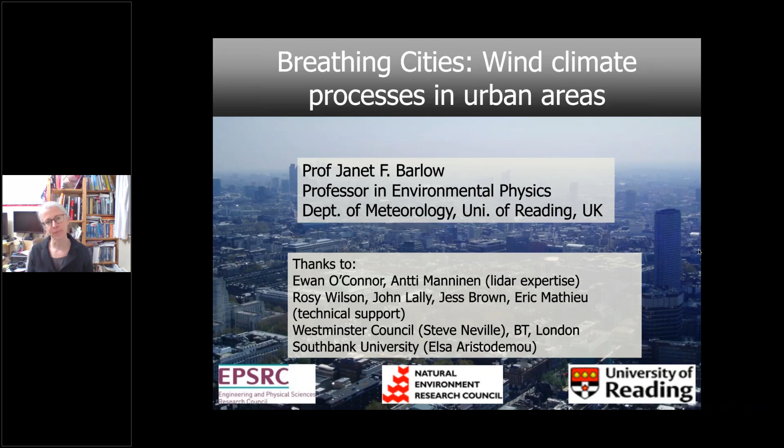So we see increasing awareness of the quality of air that we breathe. Certainly in urban areas, we know that cities are very polluted. They're polluted at the scale of the city and the streets where the traffic is emitting the pollution. And we're aware that in our buildings, we have indoor air quality issues which are starting to come up the agenda. Now, in this particular year with COVID, we are very much starting to talk more about ventilation. So good ventilation of buildings. So how do we exchange stale, polluted, perhaps pathogen-laden air inside our buildings with fresher air outside? And how can we do that effectively?

But then we have to think that the air we're taking into our windows comes from the streets outside. Good ventilation depends on having clean air at street level, and the air in the street is influenced by the quality of air at city level. So all these processes are connected to determine what the quality of air is in the buildings in which we live. And not just air quality, an increasing concern is temperature. So are our buildings overheating, and will they overheat in the future? And so ventilating buildings and cities effectively is something we need to think about design issues in cities to achieve. Next slide.

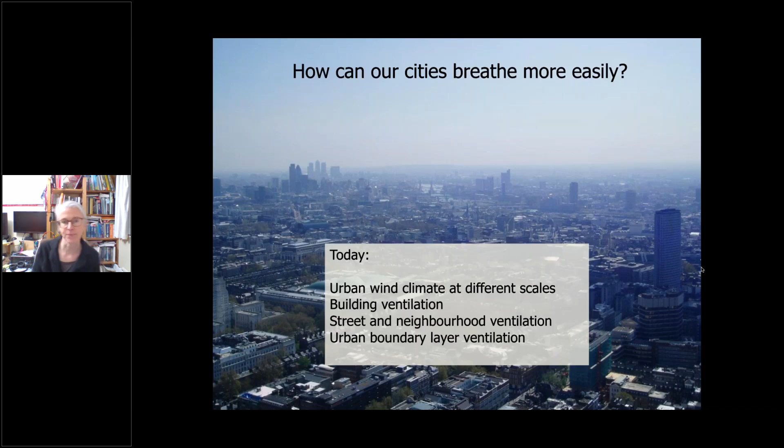Okay, so starting with the processes, we can think about that. Yes, please, next.

We can think about the processes of wind flow around our individual buildings, where we might be sitting watching this talk. And we know that the flow is very 3-dimensional. It's very much determined by the shape of the street and the building itself. We know this 3-dimensionality of the flow is what we find in the roughness sublayer. Right? So this is the bottom layer of the atmosphere, above which we find the inertial sublayer, where the flow is a lot more homogeneous.

It's the same everywhere. And the depth of the roughness sublayer is around about 2 to 5 building heights, which we give the symbol H. And the scale of the street is around about 10 to 100 meters. Next.

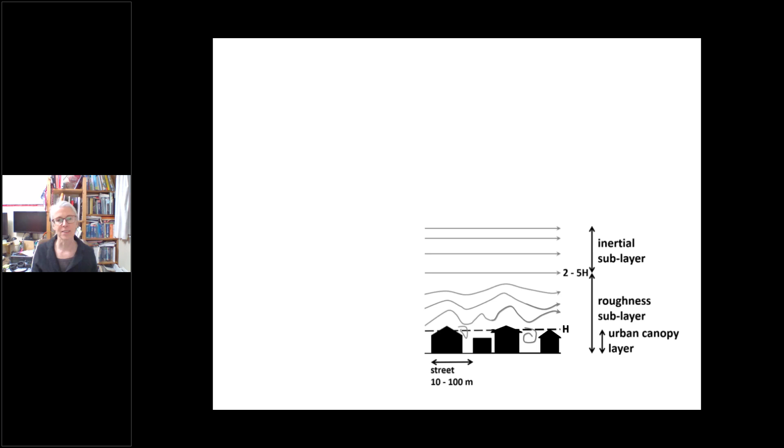So if we zoom out a little bit, that street is sitting in a neighborhood of similar buildings, which might have a scale of around 100 to 1,000 meters. So that's a patch of the city, which is very similar. It has a similar friction that it exerts on the wind above. And as the flow is coming across the city from left to right, then an internal boundary layer is formed. So this is an area where the wind flow is in equilibrium with the surface.

And then when the wind moves on to another patch, it has to develop a new equilibrium determined by the roughness. So these internal boundary layers at a certain height, they blend out, and we get back to some kind of homogeneous wind field again. So if we move on to the next slide.

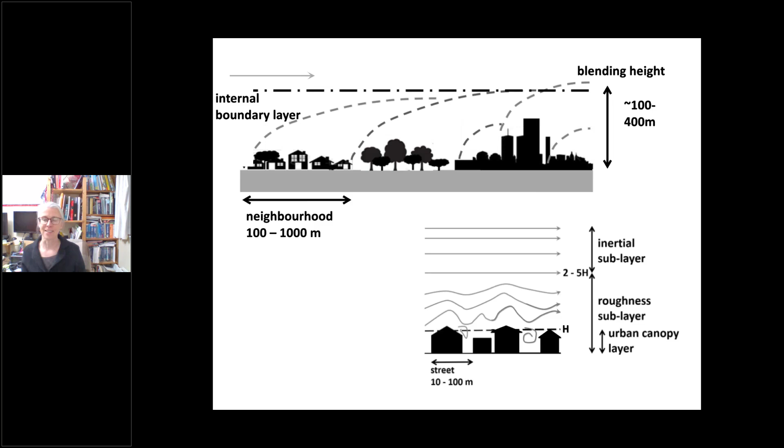Then we zoom out again to the city scale. So if the city is of the order of tens of kilometers in size, we see the rural air flowing over the patchwork of the city surface. There's a gradual adjustment over each patch, but then we build up an entire urban boundary layer which is adapted to the whole city. And because the city is hot, there's convection over the city which mixes up the air from the surface up to the air above in the so-called mixed layer. Next slide.

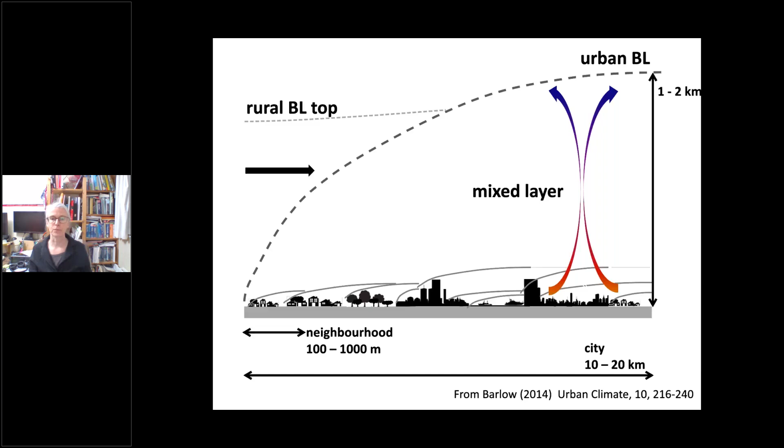If we zoom out again, the next scale up is that our city might be sitting in a regional context which determines the wind climate. So if the city is surrounded by hills, we might have these kind of processes occurring. So at night time, the picture on the left, we have cold air sinking down off the mountains, which might be flowing into the city. That might provide cool air, but it might also help to trap pollutants at low level by making it stable.

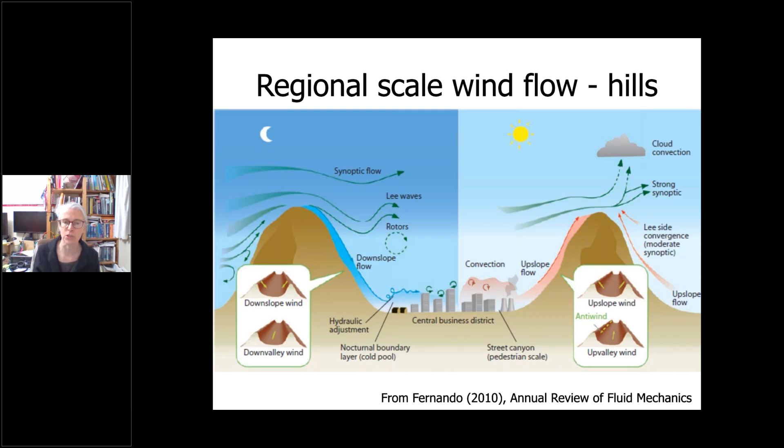So by daytime, the process reverses and hot air is drawn up the slopes of the hills. And this again can provide flows of air out of the city. So we have to think about any flows induced by mountainous or hilly terrain. Next.

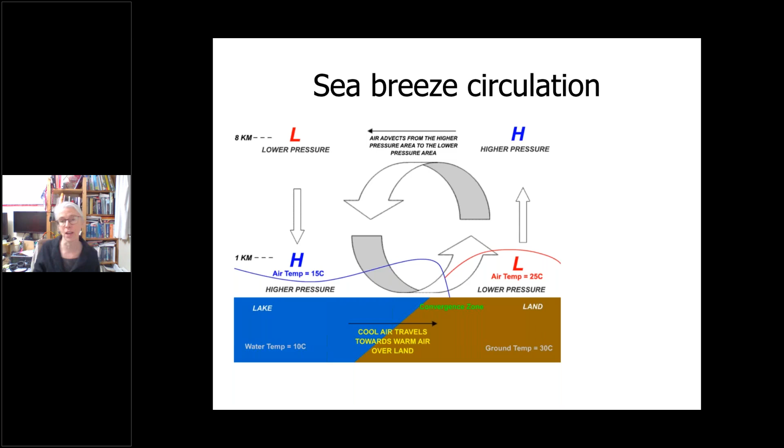Our city might be on the coastline. It might be next to a big body of water, like a lake. And this can cause a different kind of flow. So if your land surface is warmer than the water, then hot air will rise over the land surface, and that will pull in cold air from the body of water. And this causes a sea breeze circulation. So cold air coming in at the low levels, and then air returning at high levels to create a circulation. Next.

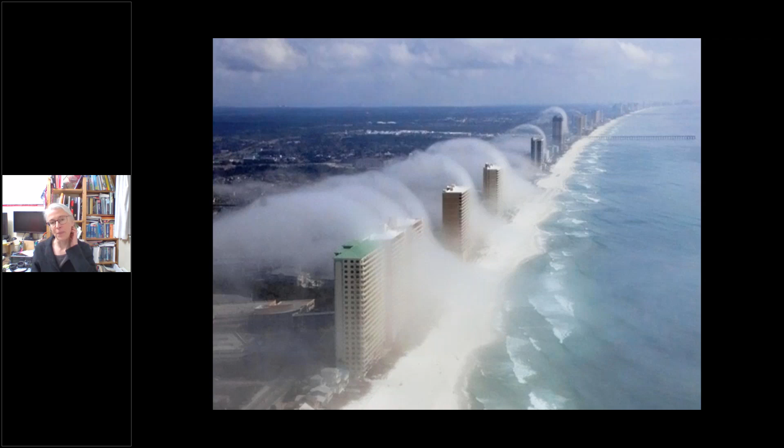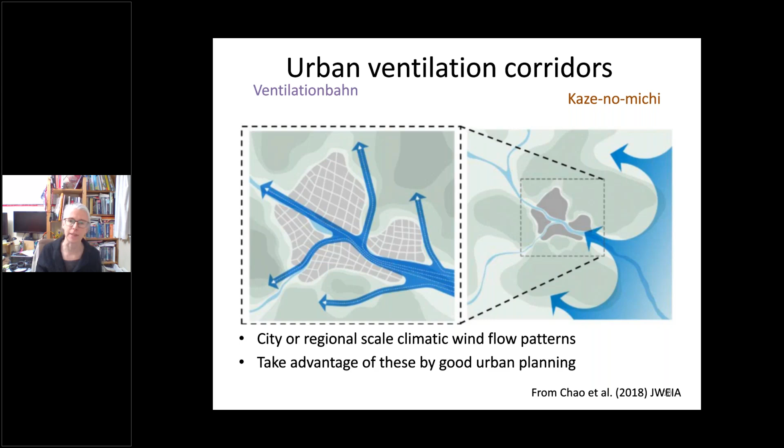So that was giving you an overview of all the processes and starting to think a little bit about how these different scales are linked. But now I want to zoom in back to our building and think about ventilation processes just at the scale of the building. Next.

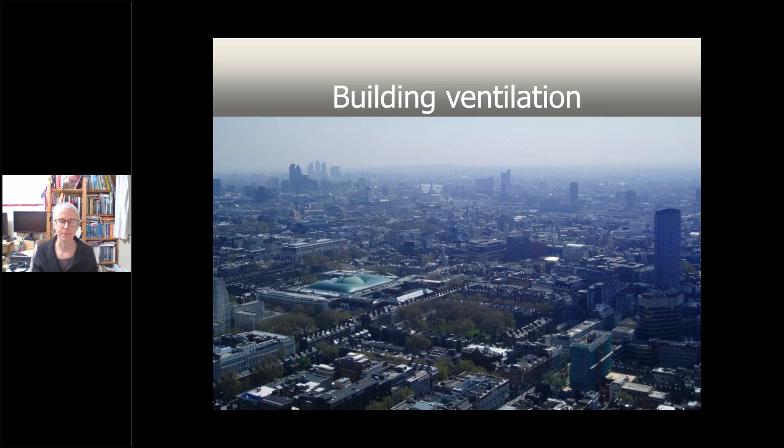I want to focus on natural ventilation as a process in the next few slides, because this is where we're most sensitive to what the wind climate is outside of the building. Next.

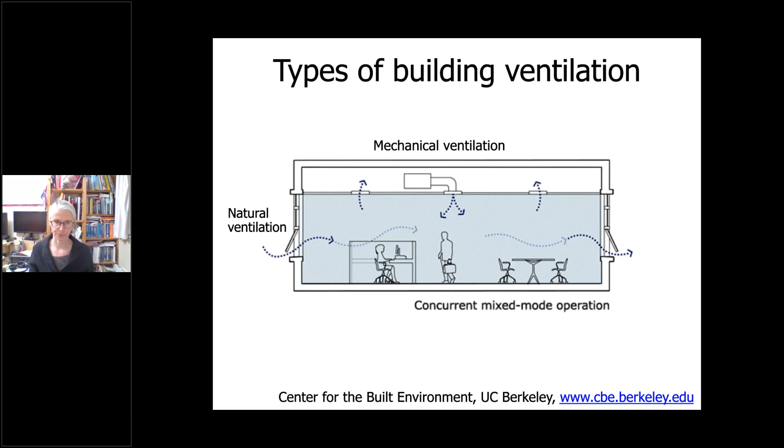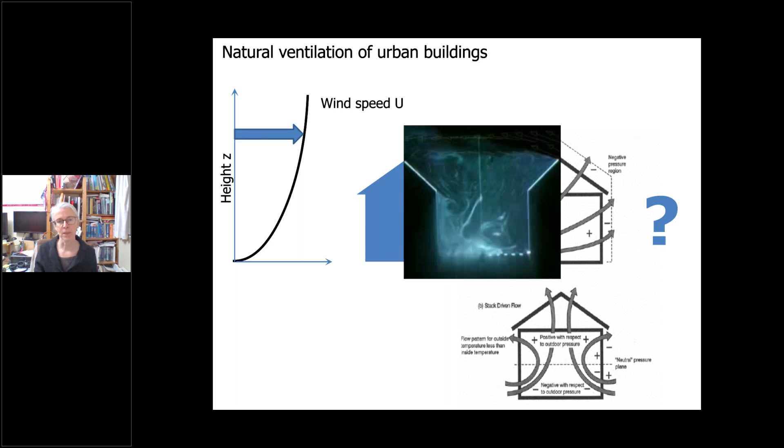The question for urban planners and engineers designing ventilation systems in buildings is what's going to happen when you surround your building with other buildings? Next. Okay, video's not going to work. Never mind. So we know that the flow around buildings is very turbulent and very unsteady. So a basic question we wanted to ask was, how is the ventilation of a building changed by the presence of other buildings? Next.

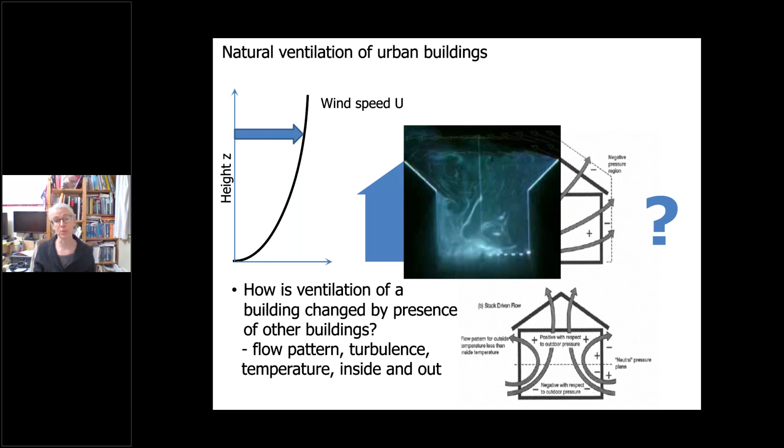So with a group of colleagues, we started something called the Refresh Project a few years ago to look at the natural ventilation of buildings, looking at the processes that were controlling the ventilation. Our motivations were that up to 90% of our time is spent indoors, and this year probably more than that. In the UK, the context is that we rely very heavily on natural ventilation of our buildings. We don't yet have extensive air conditioning. So we want to make it work as much as possible because it's a sustainable option.

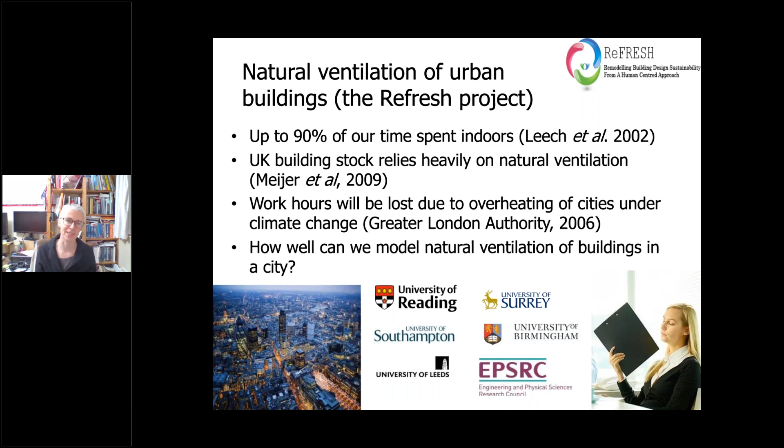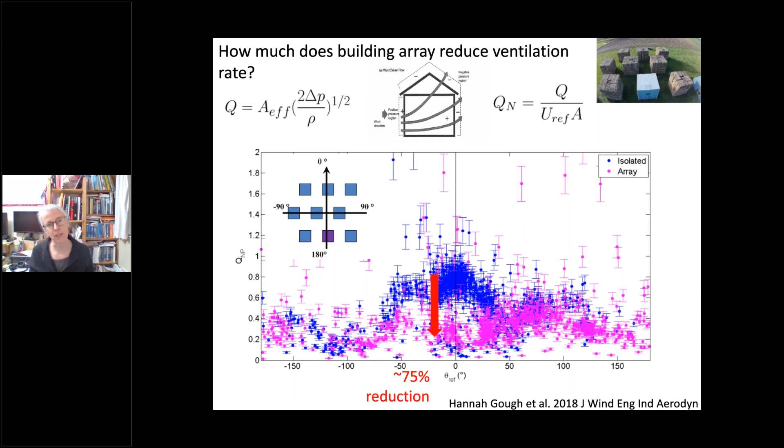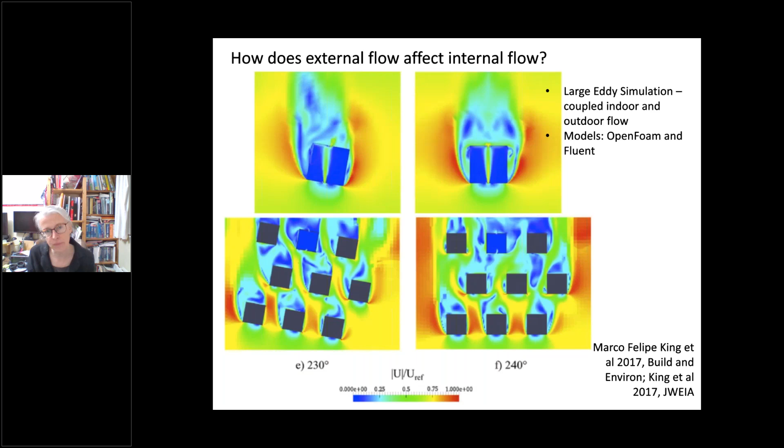So that was just one example of thinking about building ventilation and how it is affected by street flow. I want to go up the scales now and think about how a neighbourhood can be better ventilated by different shapes and layouts of buildings. Next.

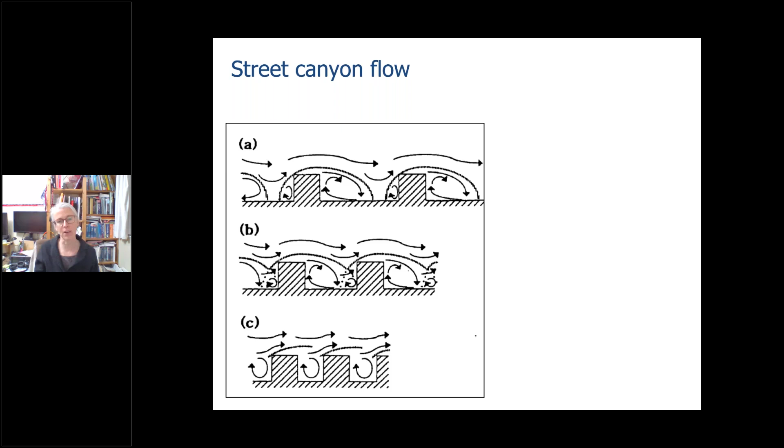So this is a bit of a classic diagram, street canyon flow, where we have two parallel streets. And the key thing here is that the wake of the upstream building gradually starts to interfere with the downstream building, and gradually, as the buildings get even narrower, it fills the entire street. So we can divide these different flow regimes into isolated roughness, wake interference, and skimming flow. And this is dependent on the aspect ratio of the street. Next.

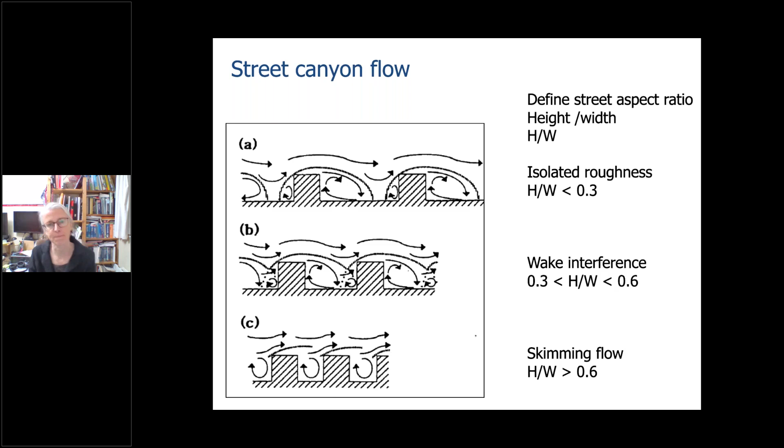Yeah, can you try next and see if these videos work? If they don't, they don't. Apologies, we've had some technical... no, all right, okay.

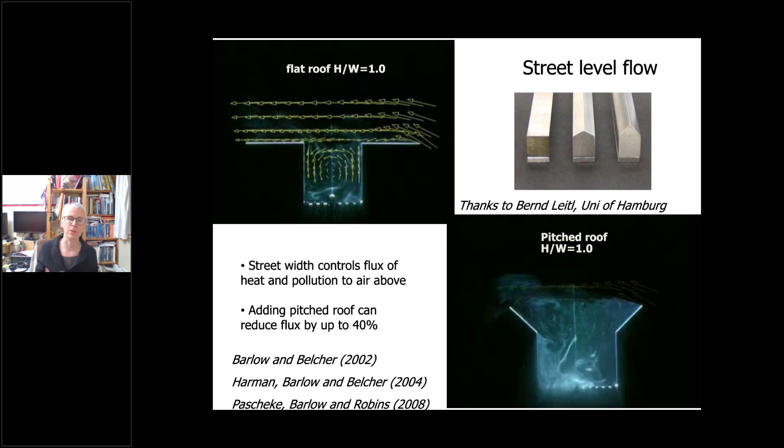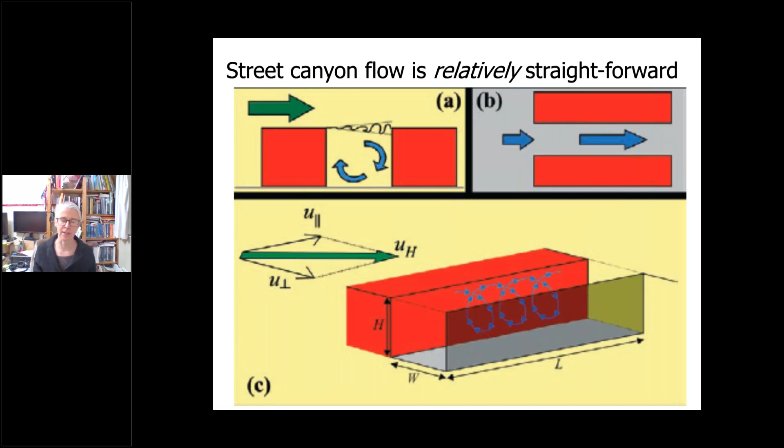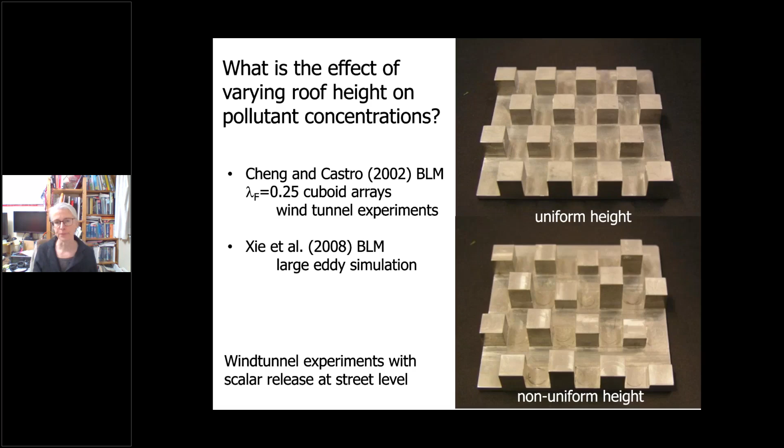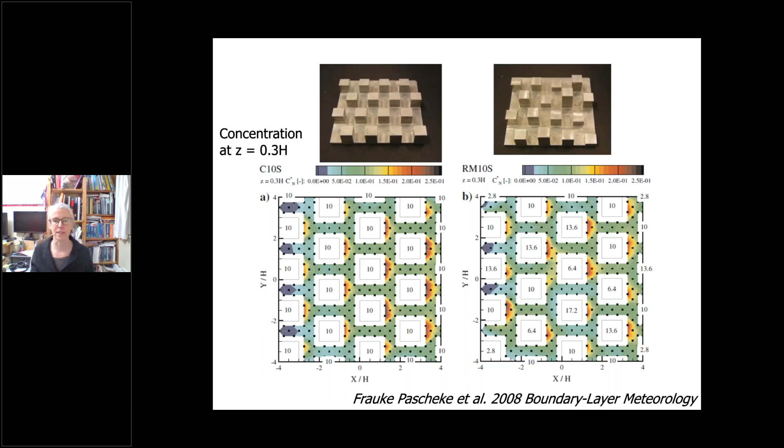So the occasional tall building in a neighborhood can do a good thing to air quality at street level. It can sort of scoop the air pollution up to higher levels, but it actually worsens the air quality at the top height of the building slightly. But the advantage here is that it disperses the air pollution downstream at height, which can be very beneficial. Next.

So those were just a few aspects of the morphology of the buildings and the way that they can affect street ventilation. But here's the question: is this a street canyon? These are very tall buildings in a neighborhood in Hong Kong. Do we understand what the flow is doing in this kind of street, or do we have to find some kind of new concept of what the flow is doing? I don't really think we understand yet how any pollution released at the base of this street would be ventilated to the air above. Next.

Okay, so we have a Doppler shift in the frequency, which is proportional to the velocity of the particulates that the light is bouncing off. So by this measure, we can have a quantification of the wind component in that line of the laser beam. Okay, next.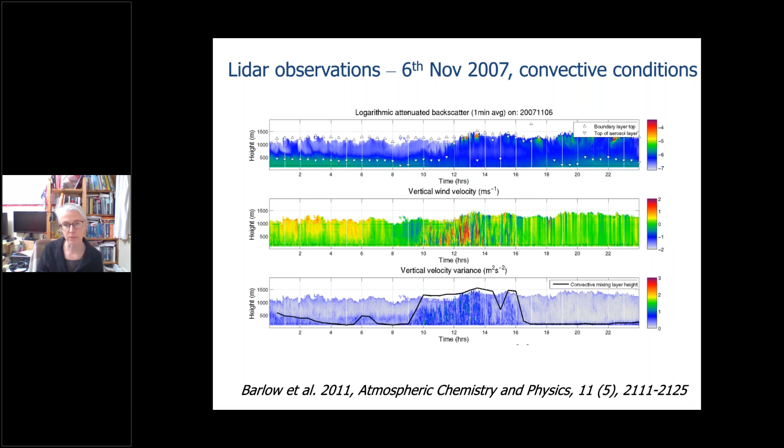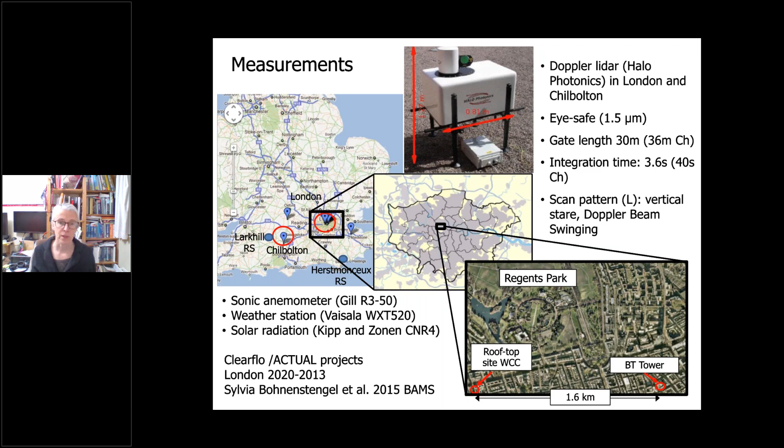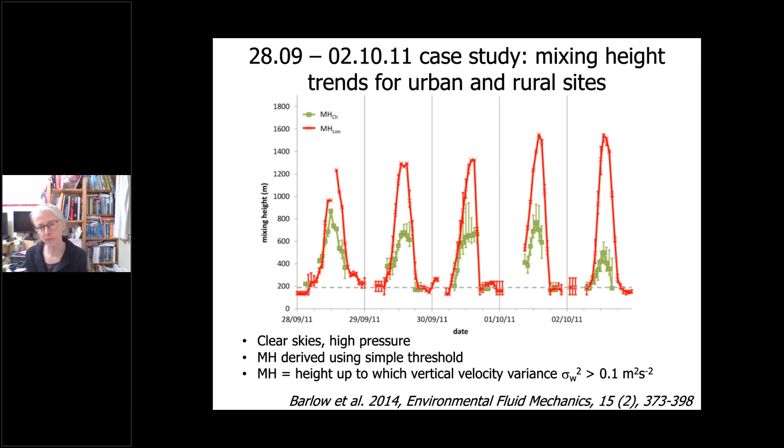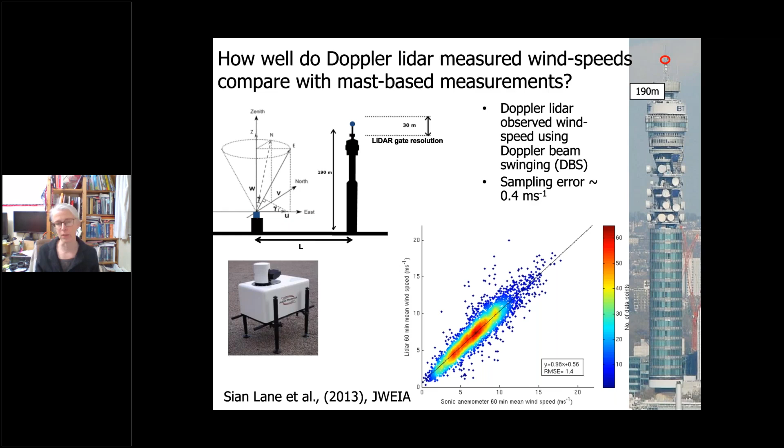So if you look at the graph down below, that shows us the LiDAR hourly wind speed against the BT Tower sonic anemometer wind speed. And on the average, there's really quite a good agreement between the methods. So that gave us some confidence that if we look at wind climate statistics from the LiDAR, we're getting something that we can trust. Next.

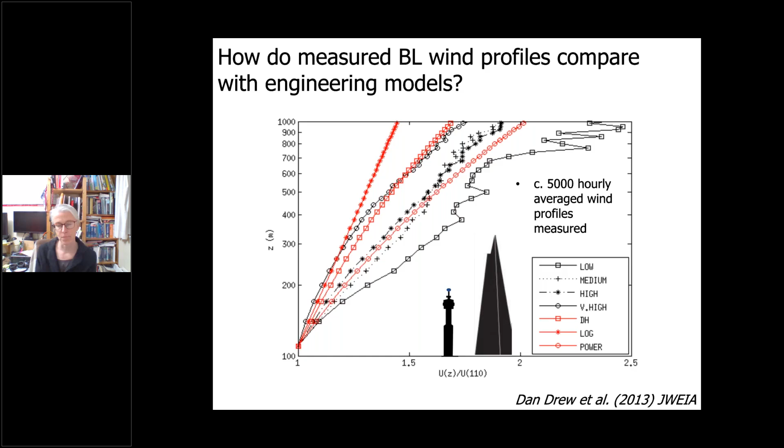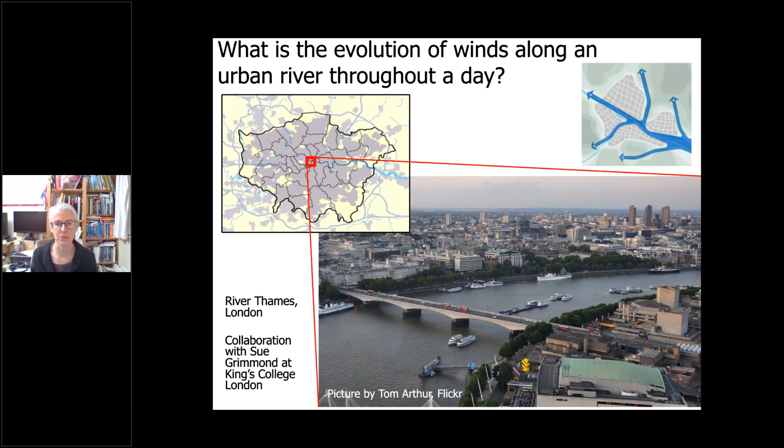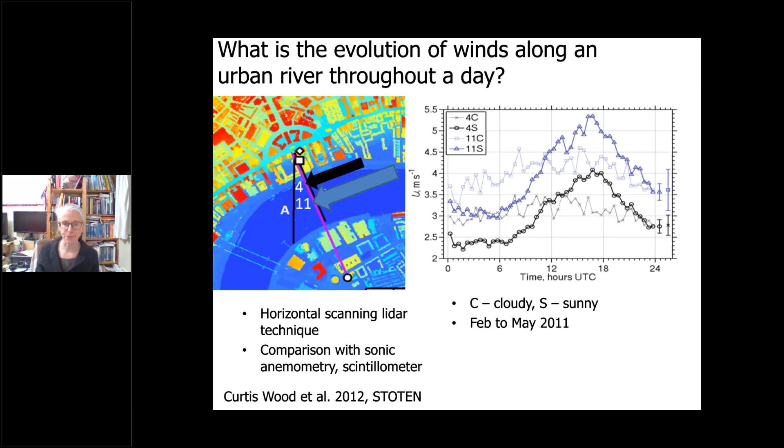And what we think is happening there is that this is a diurnal cycle of the mixing height. So as the boundary layer deepens during the day, the convection is mixing down higher momentum air at the top of the boundary layer down towards the ground, and it's increasing the wind speeds. And when you have cloudy days, that convection is not so strong, and therefore you see less of a variation of the wind speed.

the mixing height overall. So the pattern of winds local to the river is very much influenced by the entire urban surface and the cycle of stability that it goes through as the boundary layer increases in height and decreases. So those two different scales of ventilation are very much linked. Next.

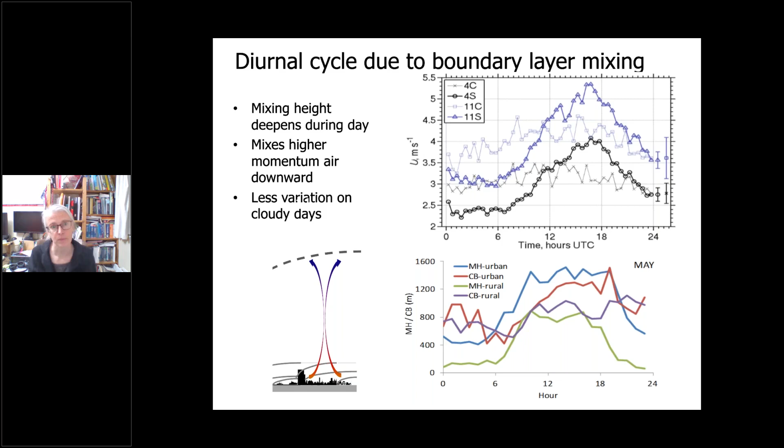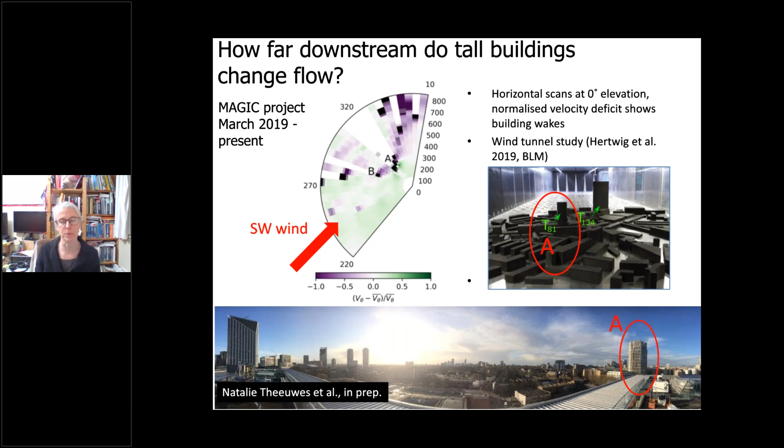And what you're seeing is the normalized velocity deficit. It's a bit of a mouthful, but what it means is where the colors are purple, the wind speeds are lower relative to the spatial average, and where they're green, they're slightly faster. Okay, so the building wakes are showing up as purple on this plot. Next.

Now, why might we want to measure the dimensions of these wakes? Well, what we wanted to do was to compare observations of real building wakes with what is assumed in a dispersion model. This is one called ADMS Build, which is quite often used in the UK by local authorities.

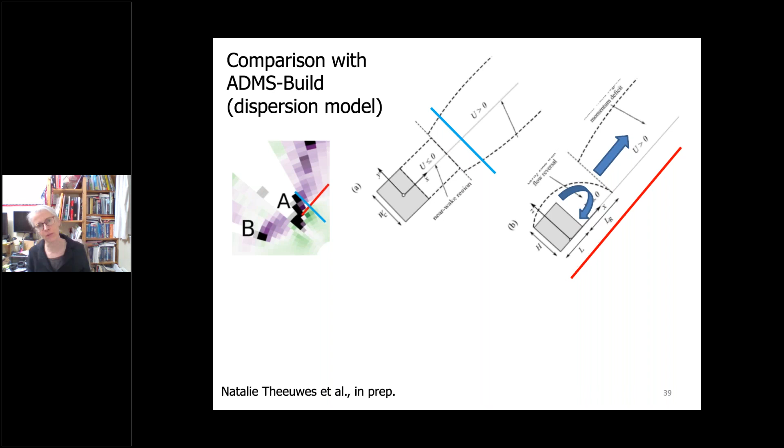If you look at the right-hand side, you can see this is the vertical cross section through the flow, and you can see the near wake is where there's a recirculating zone immediately behind the building, which lifts the pollution up, and then there's a far wake where the flow is going forward again, but it is much reduced because of the presence of the building. So we're interested in the horizontal length of the wake in red and the lateral width of the wake in blue. Next.

So that was a whistle-stop tour through some of the processes which are influencing ventilation, not just of individual buildings, but the streets outside the buildings and the city, the urban boundary layer in which the streets and neighbourhoods sit. And we can see that some of those ventilation processes are linked across the scales. So we really need to understand wind climate, all those scales, in order to design cities that can breathe more easily. Next.

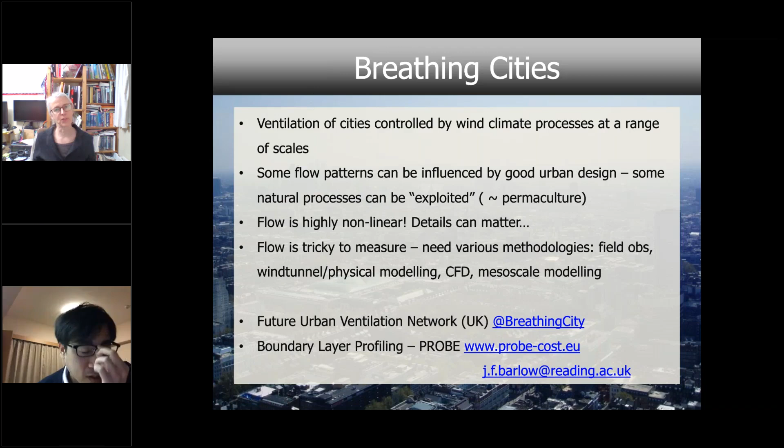I think that's a very interesting question, because I've been talking about the wind in this relatively short talk. Temperature, the change in temperature between the city and the landscape around it, could change some of these larger ventilating flows. If you have a rural area which is drying out and getting warmer compared to the city, that can change some of those larger scale flows.

I think the other thing which is happening with climate change, we know that our individual buildings are designed for cooler climates. An individual building might ventilate quite well for a colder climate, but as the climate warms up, some of those ventilation properties might get worse. So we might have to think about moving to low energy mechanical ventilation to boost ventilation in the coming climate. But I hope we can harness as much of the natural flows that are available as possible. And of course, reducing pollution would be a very good thing to do alongside climate change.

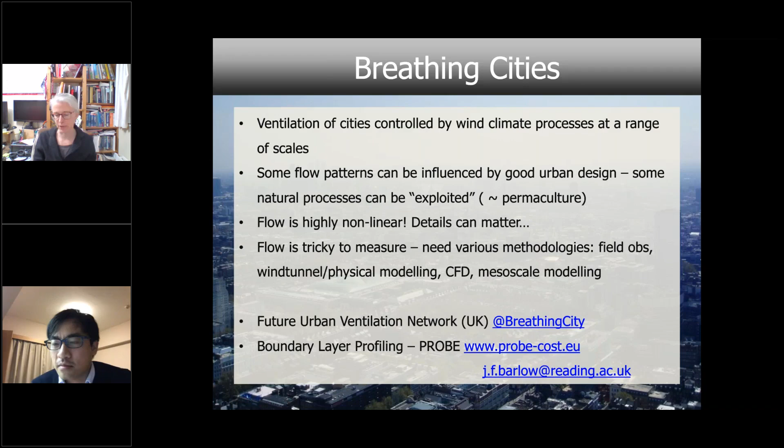I think that's another quite hot topic, and I was looking at some research the other day. If you have a line of trees within the street, there is some evidence that it can actually inhibit some of the ventilation of pollution out of the street to the air above. So potentially putting trees in pedestrianized areas where there is not a release of pollution beneath them, that's the best kind of urban design to do. I think we all agree that having vegetation and trees in urban areas has many benefits. So we should just not put them in the wrong place.